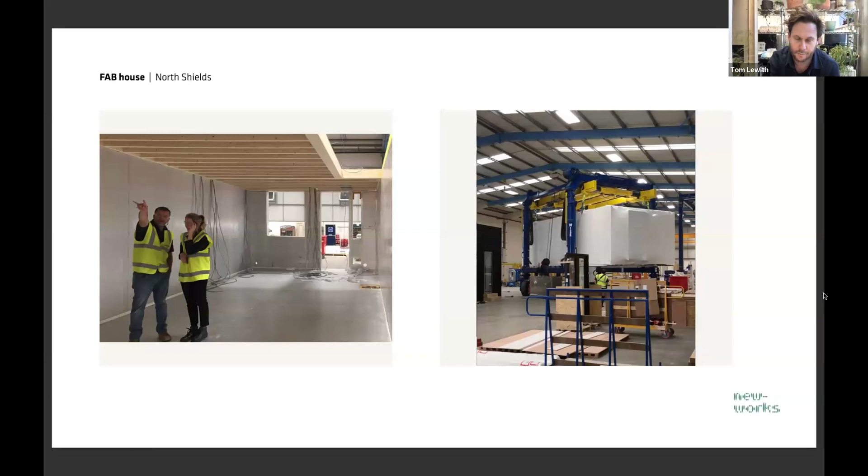So our role really with the factory team was not to introduce inefficiencies in how the modules would be put together and the scheme would be built, because efficiency really is how modular schemes become successful, while at the same time drawing out the architecture from the potential that the modular approach offered. So really it was about understanding that process so that we could introduce the architecture into the scheme.

So we decided quite early on with the factory team that the best way to design these elevations was to central line everything. So a whole elevation is central lined rather than corners abutting. So we don't have any four corners meeting, which means that if there is any misalignment, you don't read it on the elevations. But that also meant that we produced quite a unique elevation across the street, because as the building's handed, the central alignment really comes to life.

Similarly with the facades, we stepped them out so they're actually quite deep, and the reason for that was that they've been finding in the past that when the services connections were all needing to be made internally, you'd have a follow-on trade that would enter the building and potentially cause damage, when in fact the modules could be completely factory finished, locked and left, and then put on site.

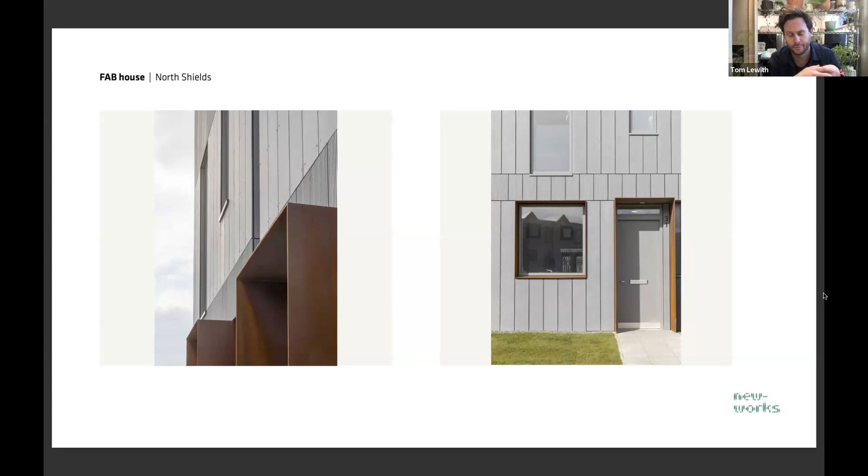So we introduced all the service connections externally behind quite a deep facade, and the benefit of that architecturally was that we ended up with nice deep reveals that gave a sense of weight and permanence to the building, which is often something that modular buildings struggle with. And then internally, we were able to explore the other opportunities that precision engineered factory-made homes offer.

And so we did the same thing on the stairs and said, let's not run any finishes for it. The way that it goes together is so precise and so beautiful that we should just leave all this as a face finished material. So we're able to take advantage of all this detailing in the fabric that was already there, and show that as kind of free detail in the building, which reduced the cost of it, but also really showed off the potential that this sort of high quality factory built housing has. So that all really came from understanding the process and what opportunities that delivered to the design.

So another project which taught us a slightly different aspect of opportunities and requirements that MMC has was the Low Line arches project. So we've built two of them and we're underway with the third at the moment. And really the important lesson we picked up here was around the tension that exists between standardisation and customisation when it comes to MMC, and the natural need to standardise so that it actually is an efficient approach, but also the need to be able to customise so that as a piece of architecture it can sit on the site and respond to the brief.

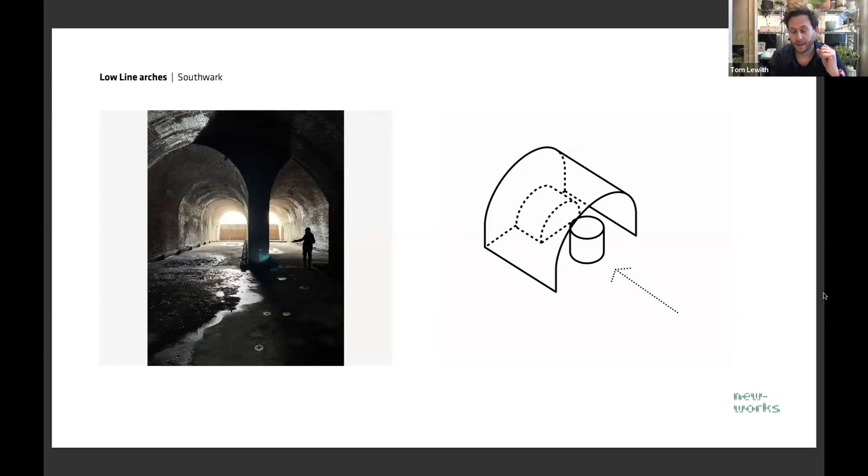So what we did was basically learn from Nissen sheds, which are sort of interwar metal structures that were kind of half circles, very efficient and really simply made, but really beautiful things, and adapt them for different uses in the arches. So we were able to componentize and pre-manufacture everything that is required to make these spaces, which makes them inherently adaptable and flexible as well.

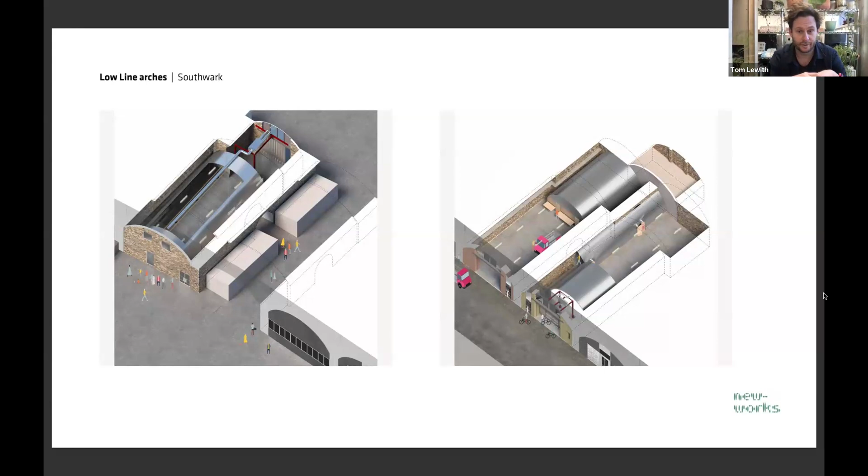So this is two of the built projects. You can see in the background there of the left-hand image one of those spaces which started out life as a bike store, but is now a workspace. In that arch, there's several changes of uses that have occurred since it was built. And the scheme on the right is a cultural centre, or a flexible community space, which has been used for all sorts of functions, from exhibitions to local community gatherings. It's been a polling station. It's been all sorts of things, but it's inherently flexible.

So these structures can all be unbolted, taken apart, and moved to a new arch and leave the arch in the kind of amazing state that it's in at the moment.

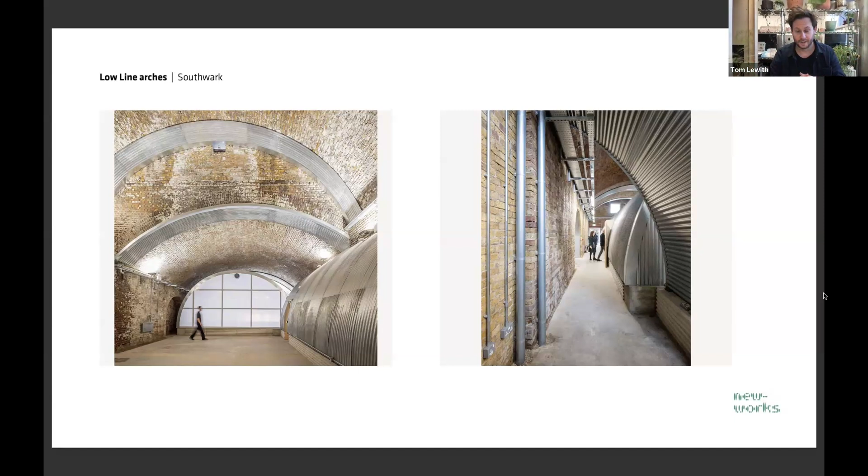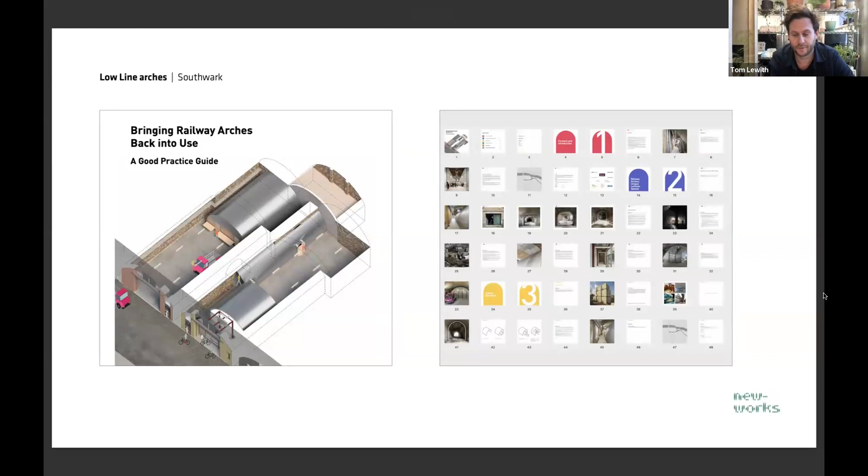And these are all a pre-manufactured kit of parts made from readily accessible materials, most of which you can get from builders merchants, nothing complicated in there. So in this project, the process was really key, but the componentized approach led us to be able to create flexible, adaptable, customizable space, whilst also being a standardized kit of parts. So that was actually quite important in terms of how we then understood and approached the brief that we were working to with the Phoenix.

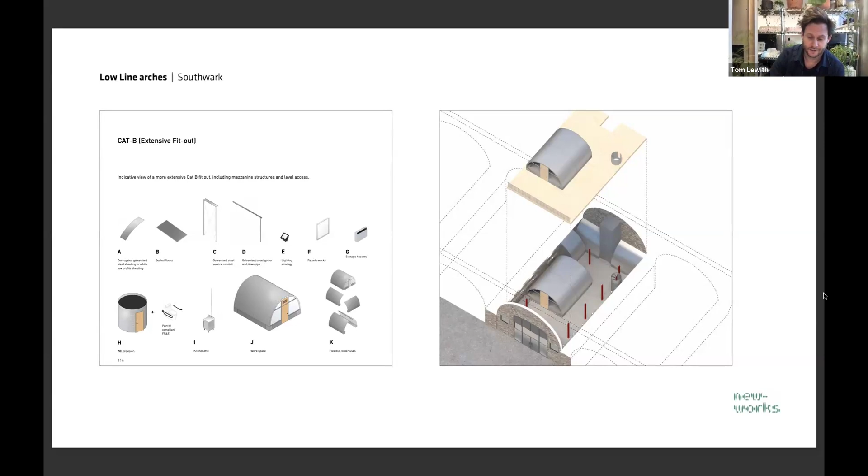So this importance of understanding process, and understanding how we can introduce customizable solutions to a standardized system. Those two principles are, I think, where we see the real possibilities and opportunities of modern methods of construction, because it's balancing what MMC wants to be, which is standardized and efficient and repeatable, with what architecturally the possibilities are, which often involve a bit more customization and thinking about how to draw out the architecture from something which wants to be very efficient.

So our work with Human Nature on the Phoenix revolved around the Gale blocks, as you can see on the right, and Andy will talk more about the project in detail in a minute. Our work on the Gale blocks really focused on how do we introduce an MMC solution which is relevant to the site, because it was a high performance, high quality, low impact and mass timber scheme that could be used to take advantage of bio-based materials, and do that in a way that reflected Human Nature's principles.

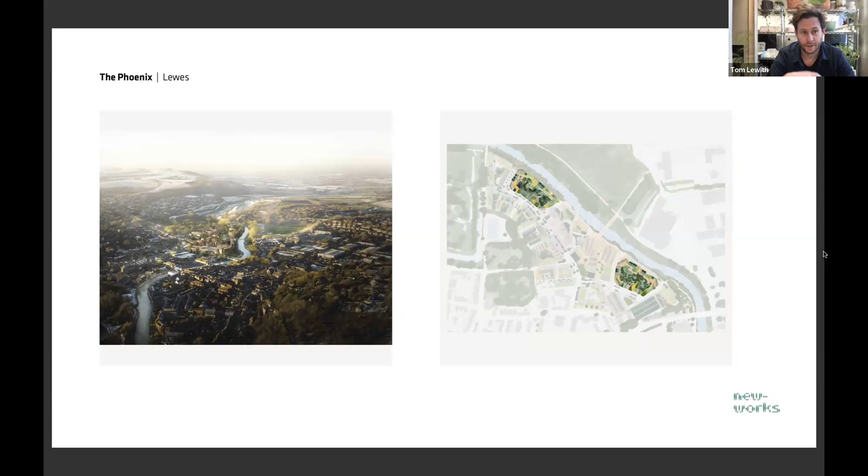So Human Nature's principles include certain key thought processes, such as raw and craft, which is about a standardized and customizable balance, strong, robust and adaptable structures, and build and design, which is about understanding how we build and dismantle buildings in order to design them in the first place. So very closely aligned to the idea of thinking about process, which I was talking about earlier, and how we design buildings.

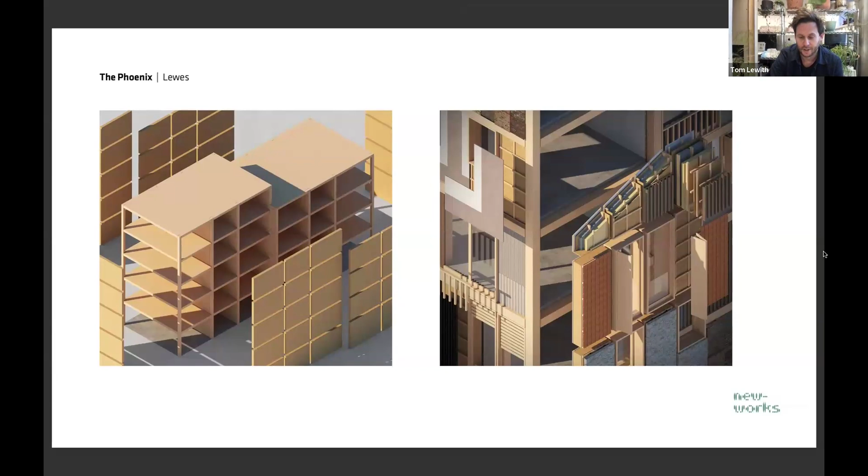And the solution we arrived at through the series of workshops was, as you can see in the left-hand image there, a series of CLT plates and party walls, and glulam and LVL columns, which form a skeleton and a rhythm for the building, and then a series of non-load bearing customizable facade cassettes, which are basically plugged in. And those cassettes have a very customizable quality to them. So you can see a bit more detail here.

The cassette we arrived at on the left, and then the frame that they slot into together on the right. And the important balance that we struck there was that there should be this mass timber frame, which would set the rhythm for the building, and that would be an off-site manufactured solution, which reflected the availability of labour and materials, into which these cassettes can be inserted.

And those cassettes are inherently crafted and customizable with handmade elements and finishes, which reflects the detail that often you can lose through MMC buildings. And those can be built in an on-site factory, which again reflects availability of local labour, local materials, Sussex timber, and then be put into the building. So still a pre-manufactured solution, but blending fully off-site with on-site approaches.

So that was how we were able to take the learnings of process-driven and standardised and customisable approaches to MMC and apply them to the Phoenix, which I think Andy's going to talk about in more detail now. So I'll hand over to Andy.

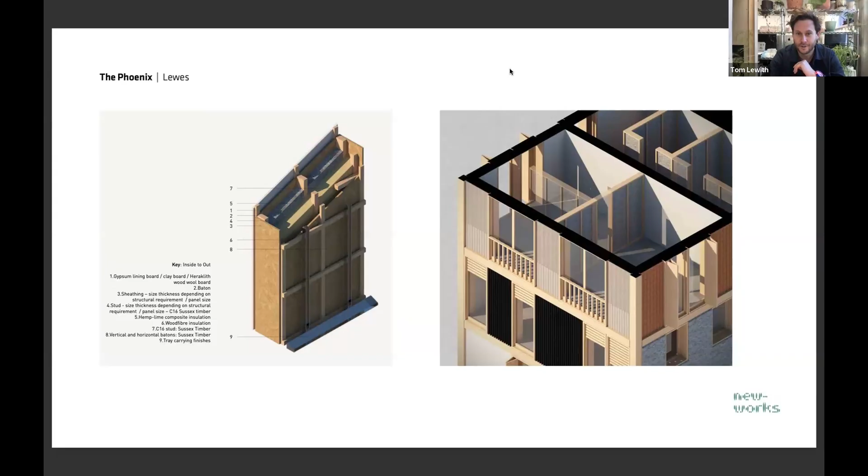Thank you. So apologies for that. So my name's Andy Tugby. I'm head of sustainable construction at Human Nature. Human Nature is a developer. I always feel a bit like I'm at an AA meeting when I say that. My name's Andy Tugby and I work for a property developer. But we're not the average developer. We're more of a campaign organisation really than a development company.

The background of the company is that the CEO and the chairman are ex-CEOs of Greenpeace, and that's the place that we come from as a company. A lot of developers now claim to promote sustainability, but our approach is slightly different in that we see development as a methodology that you can use to deliver sustainable outcomes, and we deliver that by designing places that encourage and enable communities to make better choices about the things that have an impact on the climate in their life.

And our first project is the Phoenix, which is in Lewes. There's an aerial view of it. It's a relatively derelict brownfield site on the periphery of Lewes. It's been in this kind of state for about the last 10 or 15 years. It's ripe for updating. It's right on the edge of town, and it's prime brownfield site, but you can see it's not without its challenges.

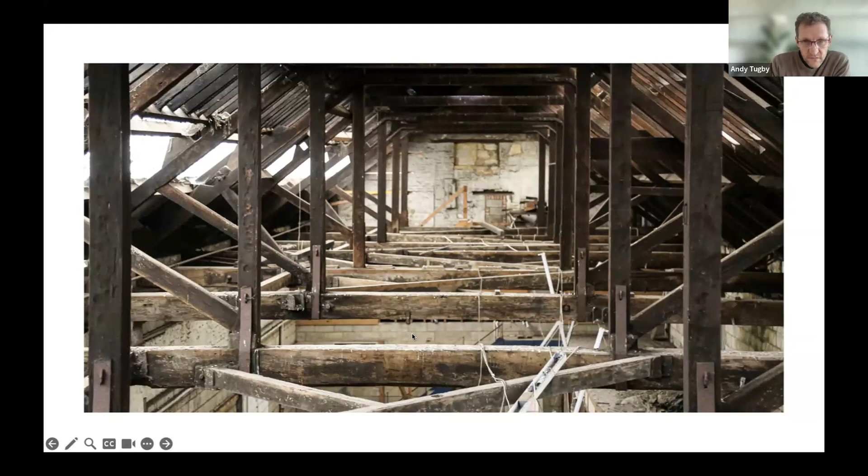this doesn't want to switch to the next slide. So there you go.

So predominantly the scheme is new build. We're designing to what we call a gentle density. So that's a scale that makes most use of and maximizes the potential of a brownfield site, while also retaining a sort of human scale. So we think 5 stories is quite a good size.

So Tom mentioned before the Gehl block. So this is a courtyard block, which draws heavily on the influence of Jan Gehl, the urban designer who arguably has designed the most effective and most successful community building courtyard blocks in Copenhagen. So we've blatantly nicked all the best bits and designed a couple of courtyard blocks that take the best learning and design and show those buildings in a 21st century model.

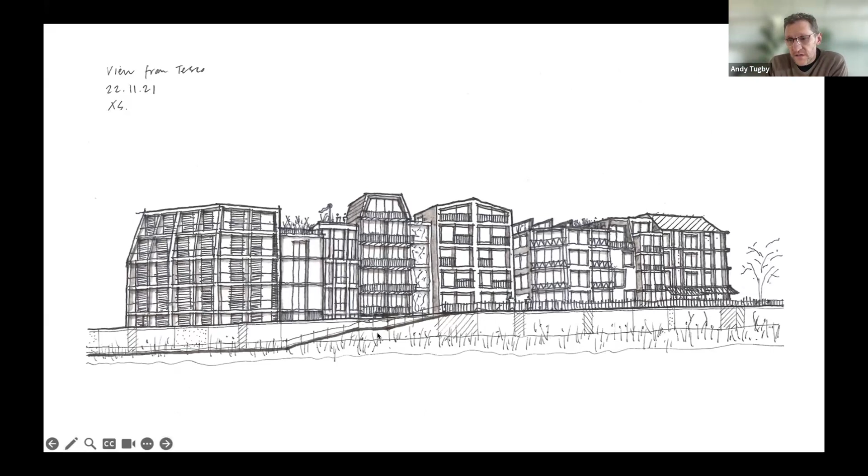But the thing that Tom started to talk about is how we construct those buildings. Tom made a much more eloquent assessment of that than I would be able to, so I'm not going to go too much into the detail, but we did carry out an exercise where we worked out how we would build the courtyard blocks. And what we've discovered since is there is a scale at which the system that Tom mentioned is more appropriate. These courtyard blocks are about 100 to 120 units in total, 5 stories. So when you're working at that scale, that mass timber structure with the wall cassette panels is the optimum solution.

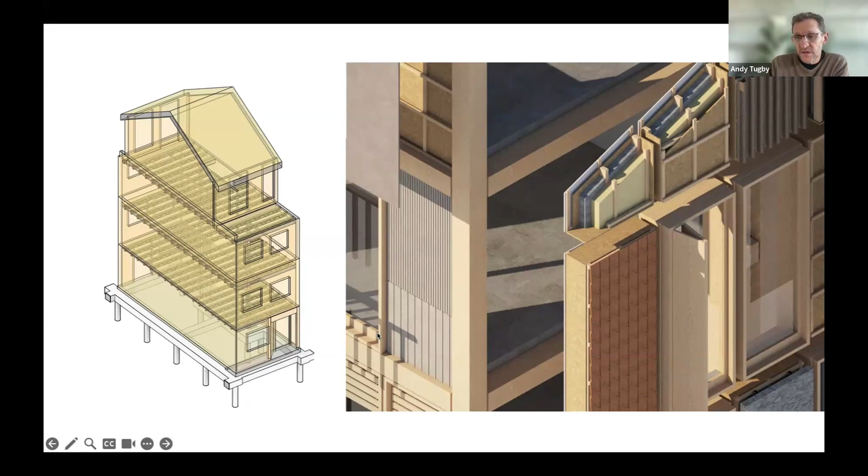And obviously the embodied carbon of the material is important, but so is the material efficiency. We've discovered through doing a lot of work with Whitby Wood engineers that a traditional stick frame construction is much more materially efficient than a mass timber frame, which in turn means that you get a much better embodied carbon figure, because as long as you're not including sequestration, it's not the case that more timber equals better performance.

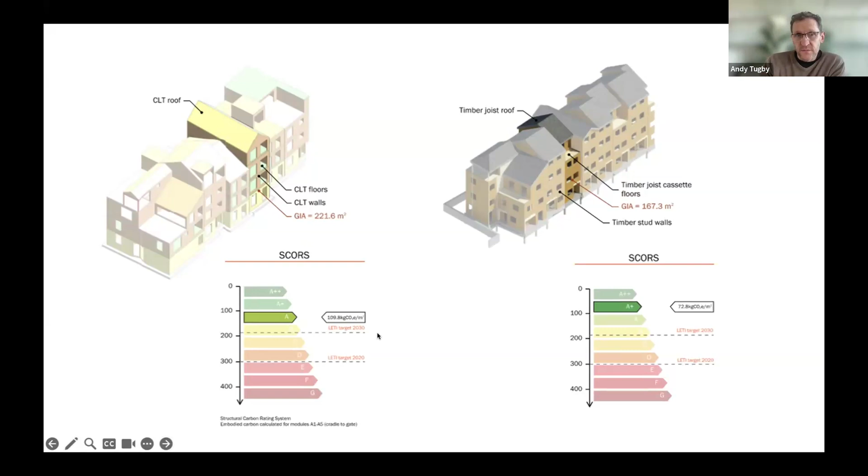So it's important to us that the buildings are materially efficient as well as operationally and carbon efficient. And to build a bit on what Tom said about the structure, the principle being that there will be a skeleton, a superstructure that does the hard work of holding the building up, that allows us to build our external wall cassettes as a system which can be manufactured off-site or near-site or on-site, depending on the conditions. And we can prioritize using bio-based construction throughout.

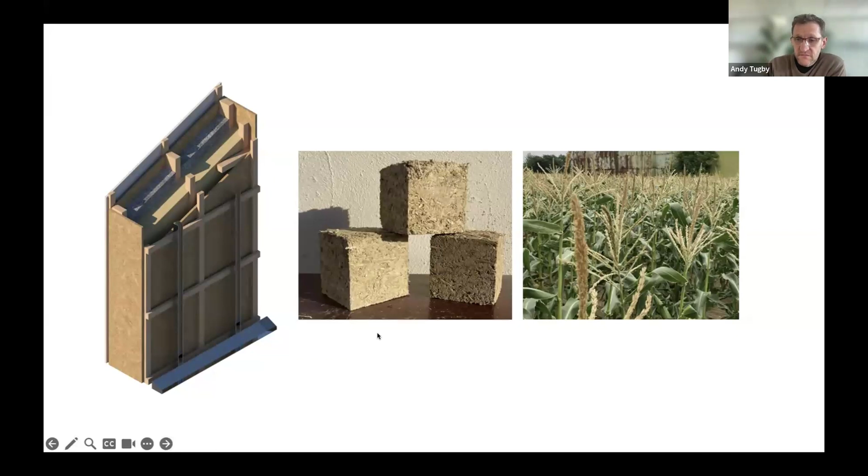And the important thing with this, I think, to mention is the fact that we've been engaged with fire engineers from the very start of our design process, so that we're certain that what we choose to design is able to be delivered. It also gives us the opportunity to look at where our timber comes from.

So we know that with the mass timber, obviously we won't be able to source that from the UK at the moment, but we can if we're building the wall cassette panels ourselves, or we have some control over that. That gives us the agency to decide where our timber comes from, where they're made, and by whom, and it allows us to prioritize local sourcing, local production, and local workforce.

And another thing, just to finish, so Tom made the point about standardization and customization being quite key, and obviously one of the main features of the Phoenix, I think, certainly on Parcel 1, is the quality of the architecture, and it's really important to be able to express that architecture with a sort of fine grain and interest, in order for it to not be standardized boxes. But then at the same time, you also want standardization.

So what we've done is we've created what we call the build and design playbook, which Tom touched on briefly, and it sets out a series of principles that get baked in as design guidance for architects, in order to ensure that materiality, so the energy, carbon, and material efficiency is baked in from the start. And it actually allows quite a lot of design freedom for the architects, while at the same time maximizing design quality, allowing for fine grain architecture, and maximizing standardization and increased efficiency.

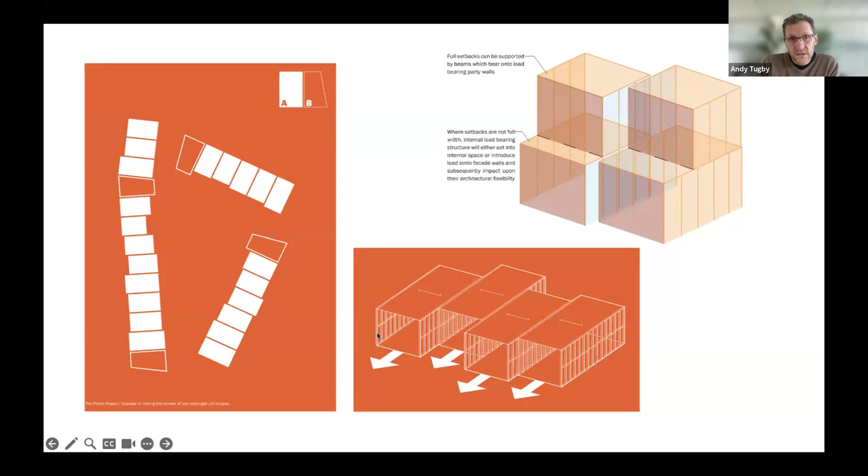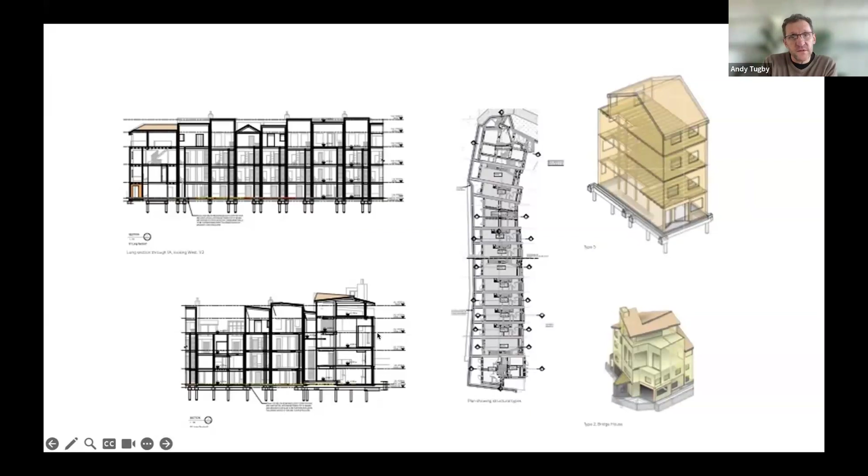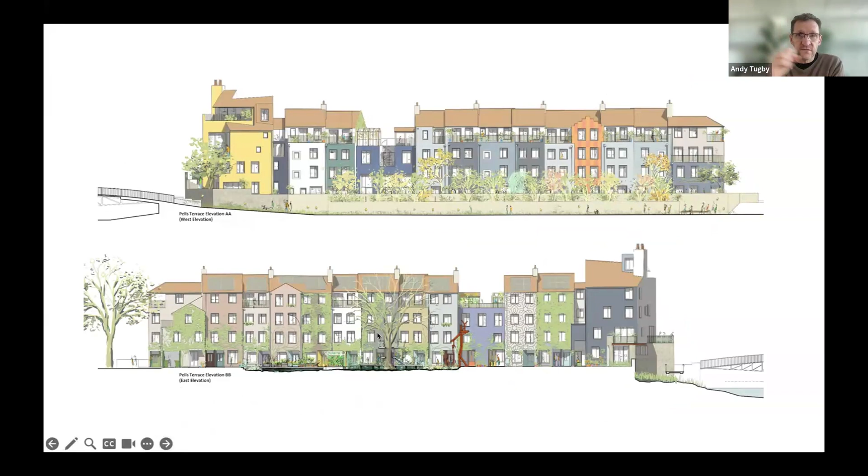Thanks, Andy. And Tom, if you're able to come back on, that would be fantastic. And such a good image to end with, that sort of vision of looking at the site. I mean, it's very sort of powerful and evocative, isn't it, as a kind of a new place. So thank you for sharing the presentations and ending on that note.